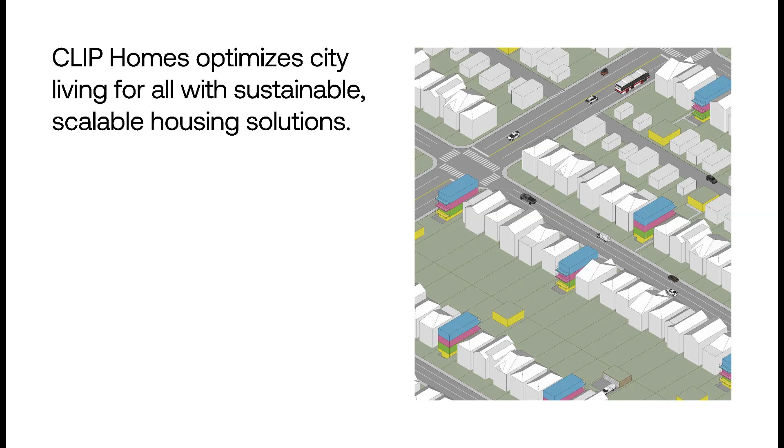In terms of the history of where we are, Bill 23 got passed in November 2022. The multiplex bylaw got passed in June 2023. I believe other municipalities like Kitchener, Guelph, and Hamilton have now started adopting these new bylaws. And Clip Homes - we recently launched Clip Homes to be able to address this new generation of homes that are going to be super exciting.

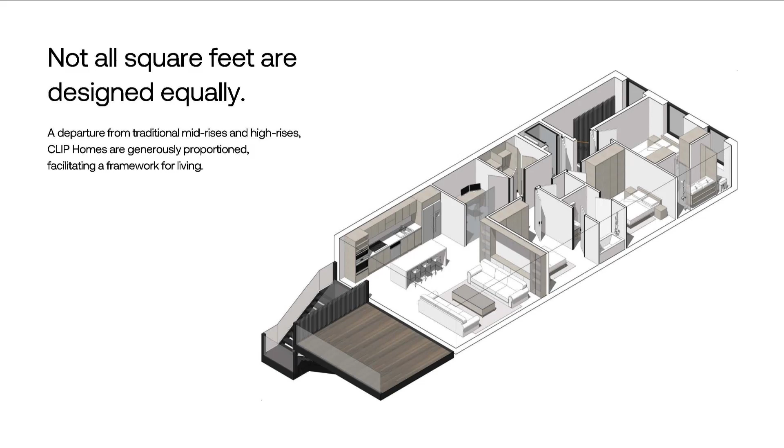Not all square feet are designed equally. As a departure from the high rises and mid rises - and I'm sure many of you have been to a mid rise or a condo recently - they have a double loaded corridor. You enter the door and see a window at the end, typically one bedroom that has a window, and then a living room. What we have instead is windows on all 3 sides and a massive balcony, which is one of the key features of what we're trying to do.

We've also engaged some of the top interior design talent in the city to build materials and create really high quality units that are above and beyond what the market currently provides.

We're introducing currently 3 models, plus a custom model - the 19 footers, the 22 footers, and the 25 footers. They average from 1,000 square feet, 1,200 square feet, to 1,400 square feet. Again, the key is repeatability and scalability.

The other thing we recognize as one of the risks has to do with underground work. Anytime you're dealing with underground subsurface basement work, there are issues around dewatering, and the city won't let you do a permanent discharge anymore. There's shoring and all the risks associated with underground construction.

We've really eliminated that. We're just doing very light, minimal touching of the earth. Our lower level units are only about 2 to 3 feet below grade, which makes the accessibility issue really work. Again, vertically stacked units that are really just designed for efficiency.

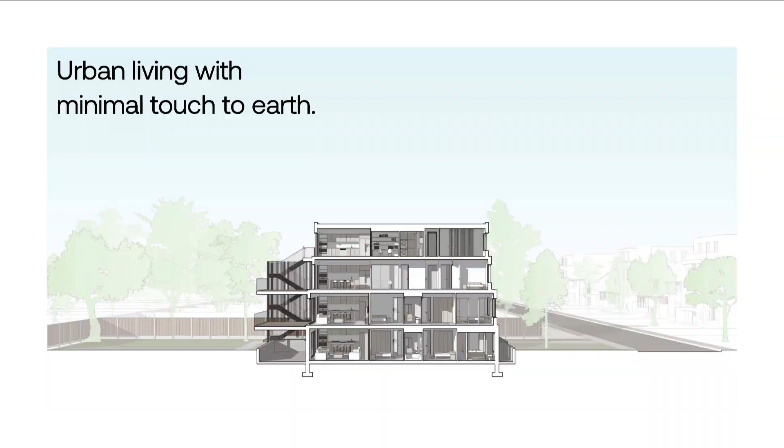Now I think one of our key advantages - we want to bring a little bit of creativity and something new to our homes, because as an office we said, what can we do in this day and age to really create something meaningful? I was having a conversation with Evan earlier, one of the speakers, and we were like, why, having traveled around the world, is housing in Toronto, in Canada, so poor? I mean, how many of you have been in condominiums that are breaking down with so many things wrong? So we really wanted to incorporate features that anchor - and these are some of the key things.

One is that we're using a combination of wood, but also with recycled steel structure. For energy, we're using ground source heat pump, which is a big thing. Continuous fresh air is going to be very important because we've got such a tight envelope. We're going to have all of our projects solar and net zero ready.

There's going to be front yard, backyard. We're going to have an integrated storage shed, 9-foot clear ceiling. We have windows on 3 sides, and I think this is really, really important because having windows and having daylight is a really key part of this thing.

And then digital twin. We're incorporating, and we can speak about some of the partnerships that are coming up, but one of the key things we believe is important is information. Every Clip home resident or developer will get a digital twin of their unit. So you're going to know exactly where your plumbing lines go, where your electrical chases are. Every little detailed aspect of the unit gets delivered as a digital twin. And then, of course, smart home integration comes in as a part of that.

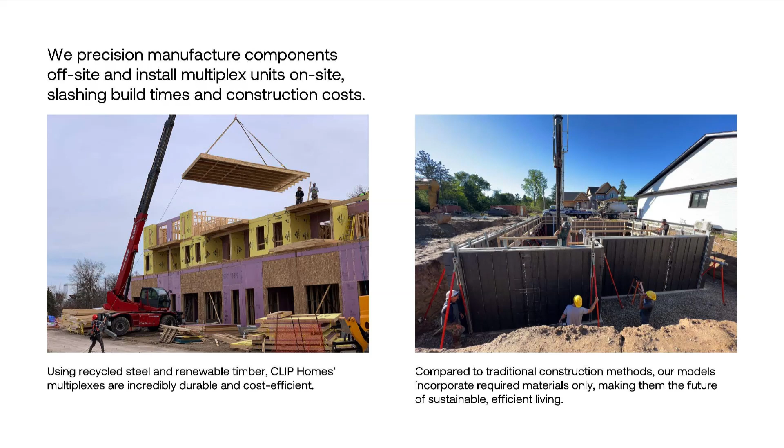The other thing we're doing is working with our partner BVB. Instead of using traditional construction methods, we're using auto manufacturing intelligence to bring about precision manufacturing, but also a different way of thinking and doing and building and assembling materials. So that's going to be a key thing.

So again, why Clip Homes? We're doing end-to-end service, efficient, timely construction.

Being in the construction industry and being an architect for about 25 years, designing homes for a living, I hate to admit it, but I've never been involved in a construction project where we've actually come on time or on budget. And I hate to say it, but that is the reality.

There's a lot of risks. I think you guys all know there's a lot of risk associated with construction. And so we really wanted to not eliminate that risk, but significantly reduce it.

Resilience is very important. With the climate changing, we need to build our homes to be resilient. We're incorporating triple pane windows as our base model, high performance building envelope, ensuring proper overhangs and setbacks that allow for minimal solar heat gain and things like that. So resilience is very, very important.

And I want to speak about also creating these threshold spaces, which I'm going to get to.

We can achieve elevated craftsmanship through scale and our components being made in a factory versus on-site. I've been to so many job sites where trades would cut a piece of lumber, use half, and the other half goes into the garbage. There's just so much waste that happens on a construction site that we really wanted to have minimal impact on earth, sustainability both in terms of what we throw out but also the kind of energy that we continue to use in our buildings.

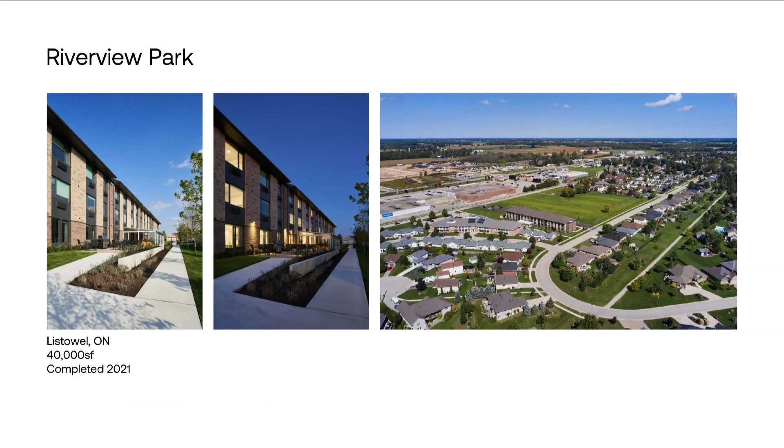These are some of the projects we've done successfully, and they're older and completed. But I want to jump right into some of the technology we're continuing to develop. We recognize that to get here requires a lot of R&D.

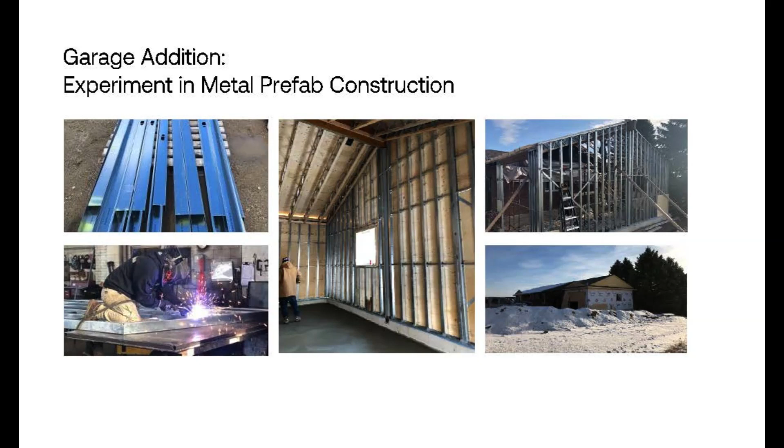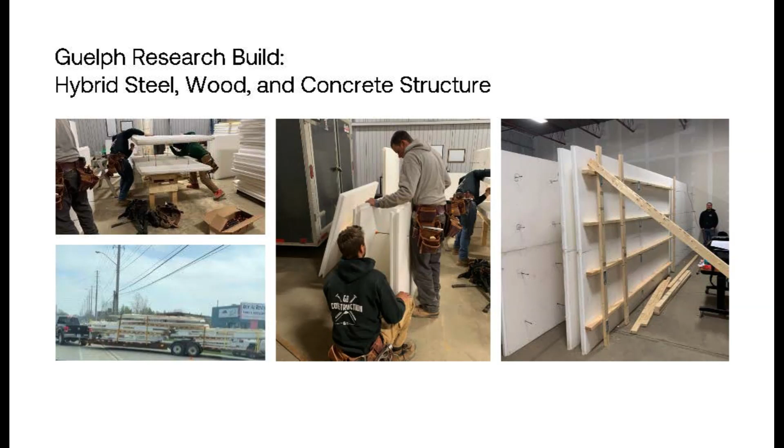Along with BVB, we've been working with metal studs, wood studs, metal and wood studs, and dense glass, incorporating different ways of assembling things. We're figuring out a different way to lay out footings to foundation walls, and we know we have to do this hybrid steel-wood-concrete structure to ensure we're OBC compliant, and dealing with the building department is a whole different headache.

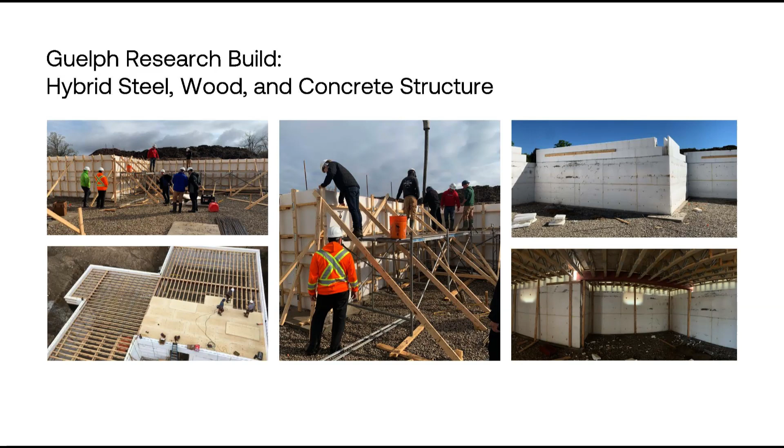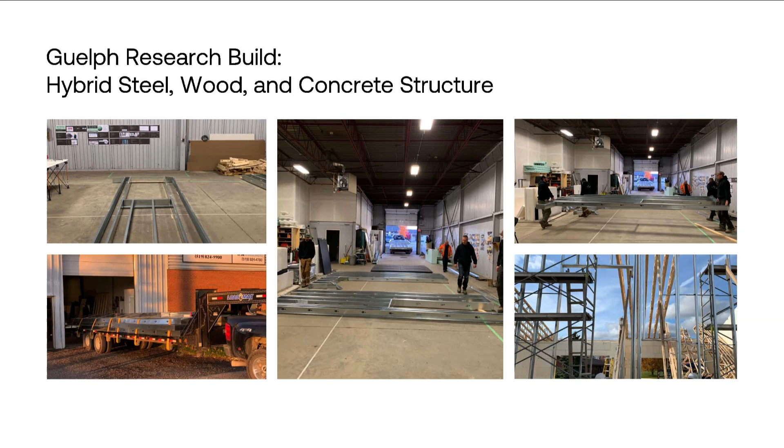But we're getting there, and we think we're on the right path to solve this issue, which is trying to focus all of the manufacturing in the factory environment as much as possible, because they say 15 to 20 minutes of factory labor is equivalent to about 1 hour of field labor. That's the kind of equivalency, and that's one of the reasons why we've got to build buildings in a factory, not on site.

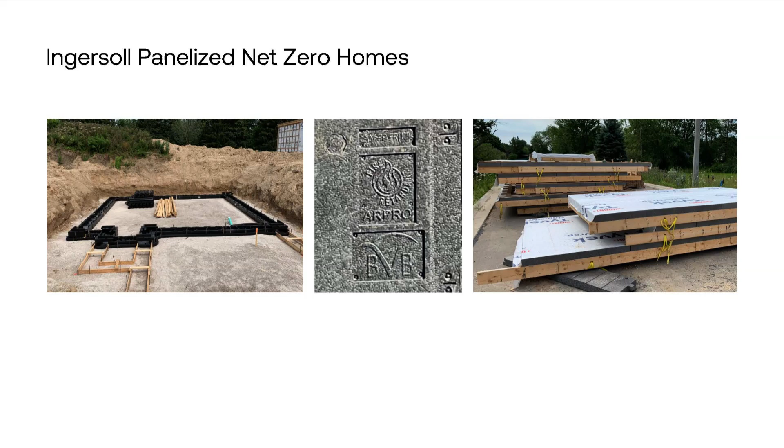So we've been testing different kinds of frames. We're also testing net zero homes, panelized net homes. We really believe in this. The way we do our footing is a little different, and our sandwich panels are light, so that people don't have back issues in construction. Health in construction is a big thing.

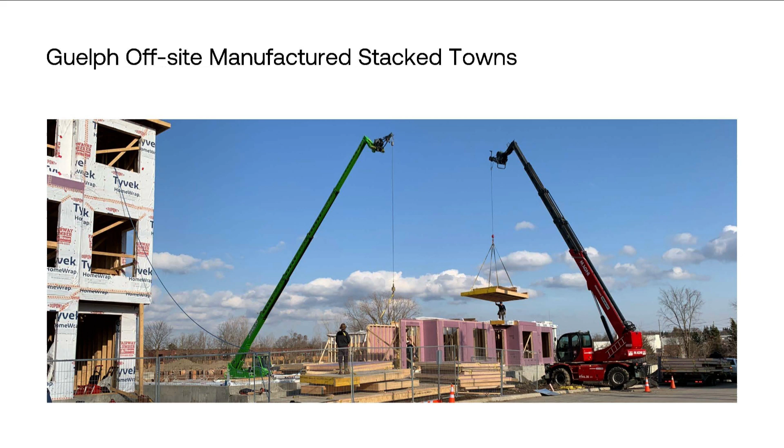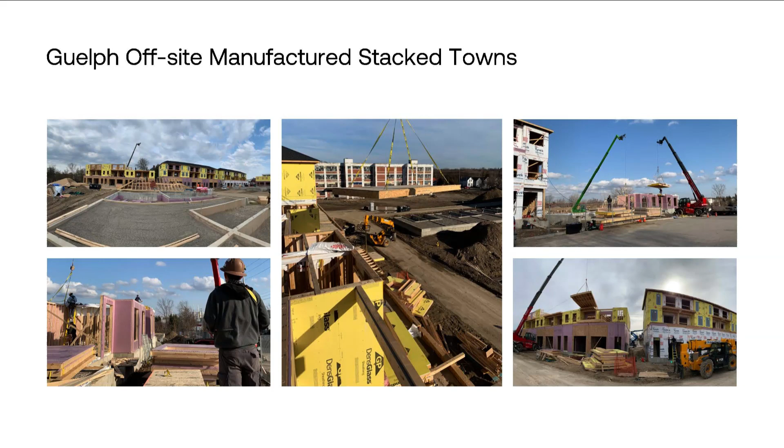Just thinking a little bit differently allows us to do that, and we've been testing it for the last couple of years, as has our partner BVB, and we continue to do this. I think we're getting closer to a precipice where now we're starting to build our second generation of homes, hopefully starting construction in the next couple of weeks.

This was an example of our first generation home, which is done more conventional method, but it's still attracting a lot of interest from various different groups.

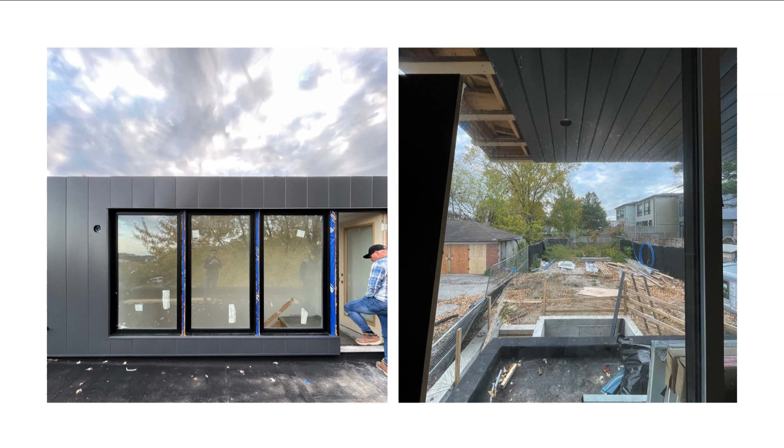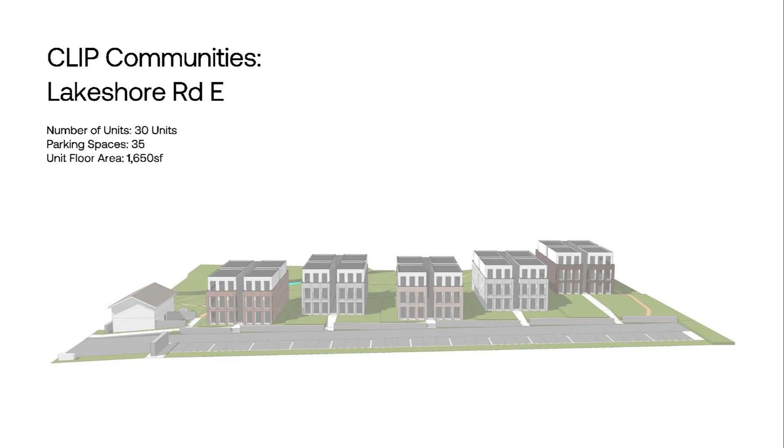Finally, we have this thing called CLIP communities, where we're working with developers that own larger tracts of land. This is in Lakeshore in Oakville, where we're doing 30 units on a large, 8-acre kind of estate lot, where we're doing it at slightly higher quality.

I want to bring you down to this, and it's a little bit personal. Speaking of generational housing, my parents are in their 80s and getting old, and they have a choice. They can move to a retirement home, or they could go to a nursing home, which I don't wish upon my worst enemy—nursing homes are like a death trap. So let's say retirement home, or...

We got to thinking as a family, hey, what if we did a lot consent? I have a large lot consent; we can build 6 units in here. My parents can move into the lower units, and then bring in some of their friends who can also buy into or move into the units. They can hire a full-time caregiver, because now it's being shared not by one but maybe 4 or 5 elderly families. Now we've got this incredible opportunity to do a 6-plex, with 4 of them requiring some level of care.

This is where I think it's really, really interesting—not only is this going to solve some multi-generational housing issues we have, but it could potentially be one of many solutions to dealing with the aged and older generations amongst us that we love, our loved ones. So I think we're super excited, and I think we're there, and we would love you to build with us.